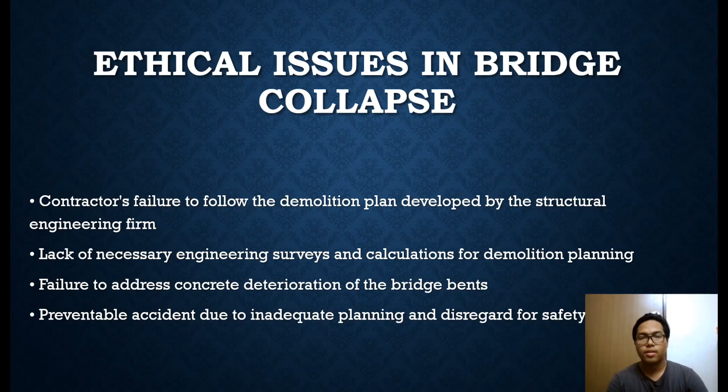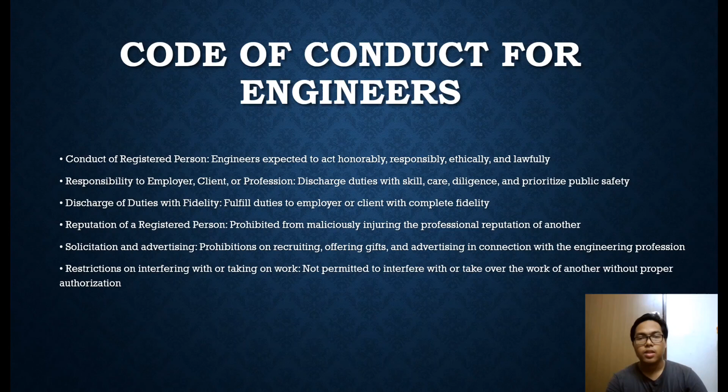Next is the importance of ethical standards, which are vital for the integrity, professionalism, and safety of engineering firms. They are essential to prevent accidents such as bridge collapses. Adherence to standards is crucial for maintaining public safety and the reputation of the engineering profession.

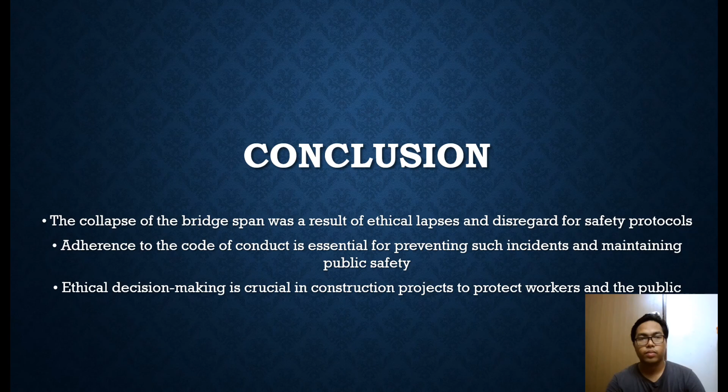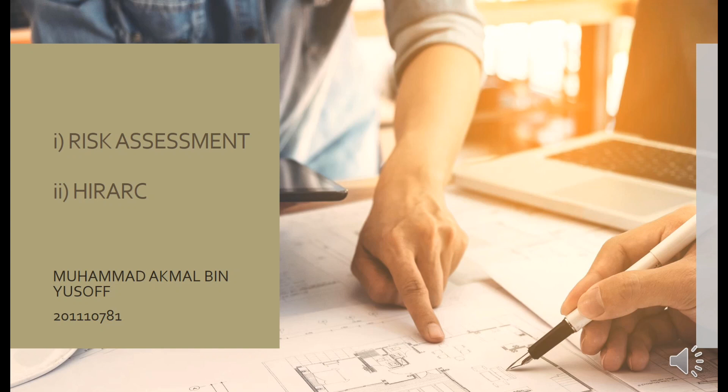I will present about risk assessment and HIRARC. So I will start my presentation with risk assessment. Risk assessment is to ensure the safety of everyone involved and minimize potential damage. A comprehensive risk assessment must be carried out before carrying out any activity on or near a bridge. Here is a breakdown of potential risks and mitigation strategies that management should consider.

Structural risk. Firstly is bridge integrity. Assess the condition of the bridge through regular inspection, paying close attention to cracks, rust, and other signs of damage. Next is environmental factor. Consider the effect of weather conditions such as wind, rain, and snow.

Next is operational risk. The first one is worksite safety. Implement strict safety protocols for bridge workers, including appropriate personal protective equipment, fall protection systems, and emergency procedures. Next is material handling. Store and transport material and equipment safely to avoid falling objects or spills that could damage the bridge or injure workers.

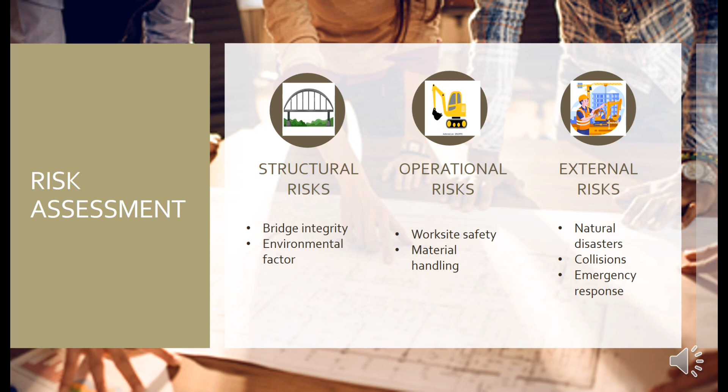And the last risk is external risk. The first is natural disaster. Create an emergency plan for natural disasters such as earthquake, flood, and fire that may affect bridge stability. Next is collisions. Implement measures to prevent collisions with the bridge, such as installing guardrails, signals, and lighting. And lastly is emergency response. Establish a clear emergency procedure in the event of an incident, fire, or other incident.

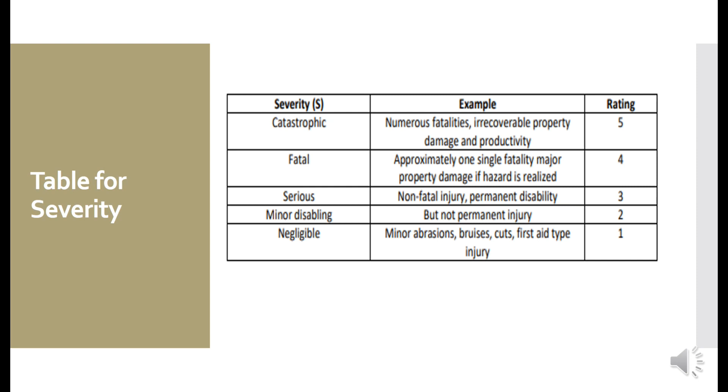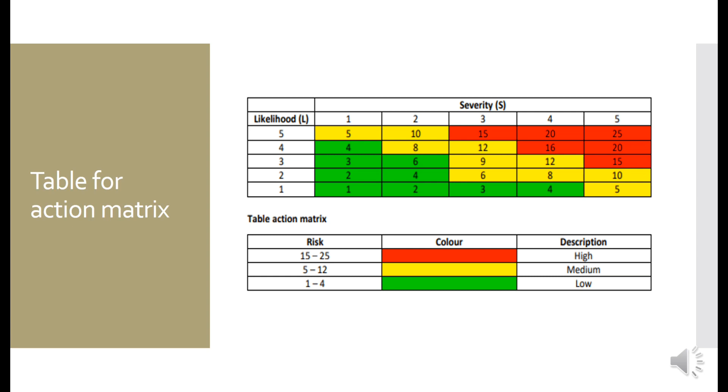Next, we move to the table for action matrix. The color red shows the high risk, which is 15 to 25. Next is the color yellow, showing the medium risk, so the risk is 5 to 12. And lastly is the color green, showing the low risk, which is 1 to 4.

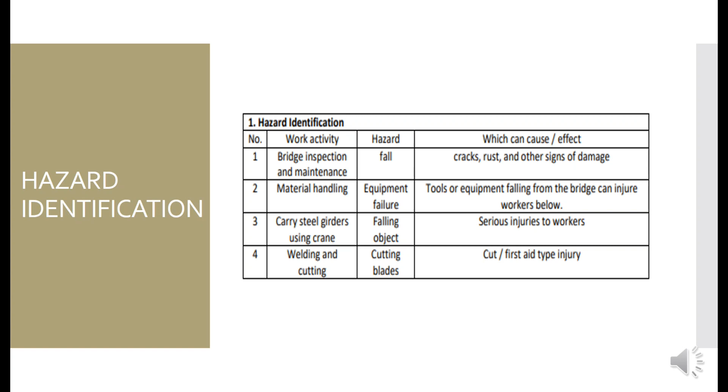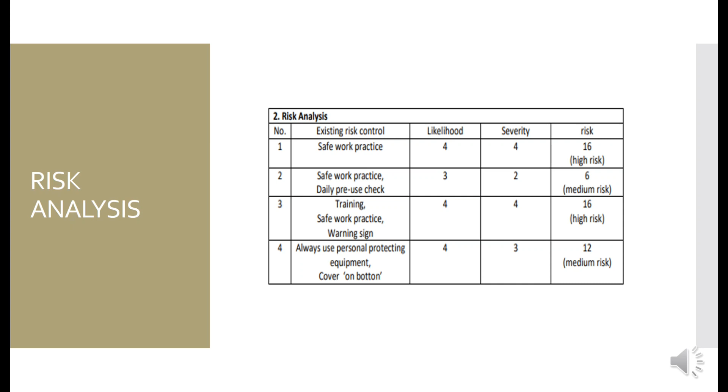And lastly is always use personal protective equipment and cover on button. The likelihood is 4 and the severity is 3. And the risk is 12. That means medium risk.

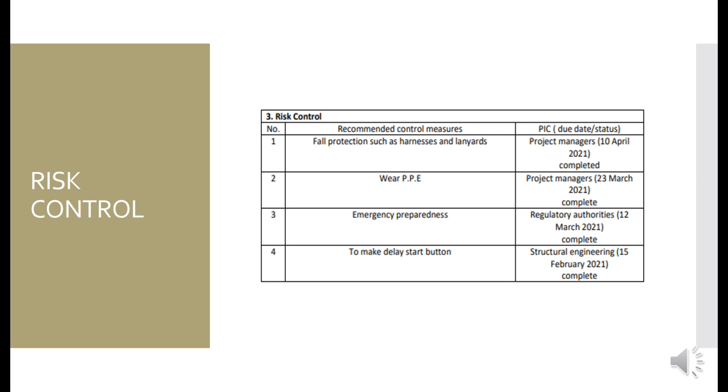I will talk about the discussion and conclusion for the article and also the overall conclusion for the article. First of all, this is the content of what I'm going to present. First, we have the risk assessment discussion. Second, we have the conclusion on avoiding recurrence. Third is the overall conclusion. And fourth, I will share the reference where I got the article from. Firstly, we'll talk about the risk assessment as a discussion.

These are the four risk assessments that I could find in the article. The first one is project management risk, second is structural engineering risk, then safety protocol risk, and lack of contingency plan. First, we will go into the project management risk, and we need to take a look at the deviation from approved plans. Failure to adhere to the approved demolition plan leads to a significant risk, compromising sequential span removal and causing structural instability.

Secondly, inadequate communication. Poor communication among stakeholders such as PCL, NCDOT, and KCI about plan changes, debris storage, and operational modifications introduces uncertainties, which would escalate the risk of error.

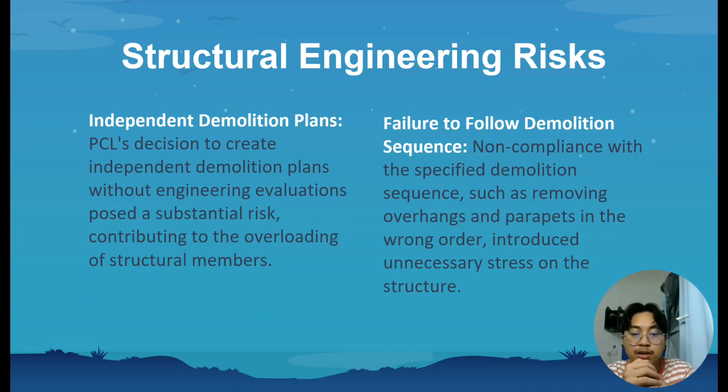Next, we have structural engineering risk. Firstly, independent demolition plans. PCL's decision to create independent demolition plans without engineering evaluation posed a substantial risk, contributing to the overloading of structural members. Secondly, the failure to follow the demolition sequence: non-compliance with the specified demolition sequence, such as removing overhang and parapets in the wrong order, would introduce unnecessary stress on the structure.

Next, we will look into safety protocol risk. Inadequate oversight leading to the collapse of span 145 exposed a lack of oversight during critical demolition stages. Non-consistent adherence to safety protocols and conditions specified by KCI resulted in compromised safety.

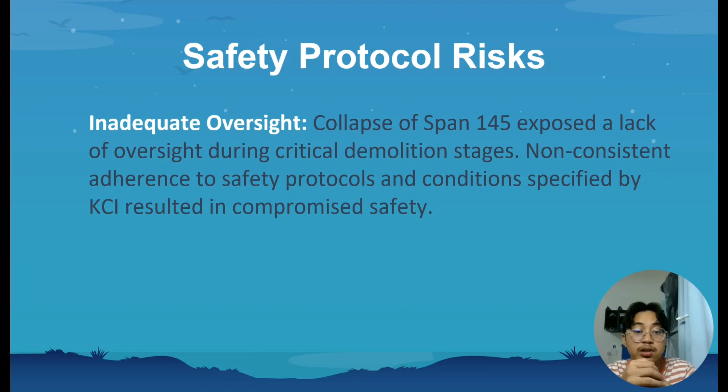Next, we have a lack of contingency plans. The absence of contingency plans for unforeseen challenges, particularly in debris storage, highlighted a gap in risk mitigation strategies, which contributed to the project vulnerabilities. And for the second part, we will go to the conclusion on avoiding recurrence of the tragedy.

Firstly, the conclusion on avoiding recurrence is adherence to the approved plan and enhanced communication and collaboration within the workers, engineering, higher-ups and the lower workers, and so on. A thorough engineering survey is also crucial, as without a thorough survey, the plan would not be very secure. And continuous oversight and monitoring is as crucial, because any project needs almost 24-hour monitoring to ensure that the risk of unwanted tragedy could be lessened.